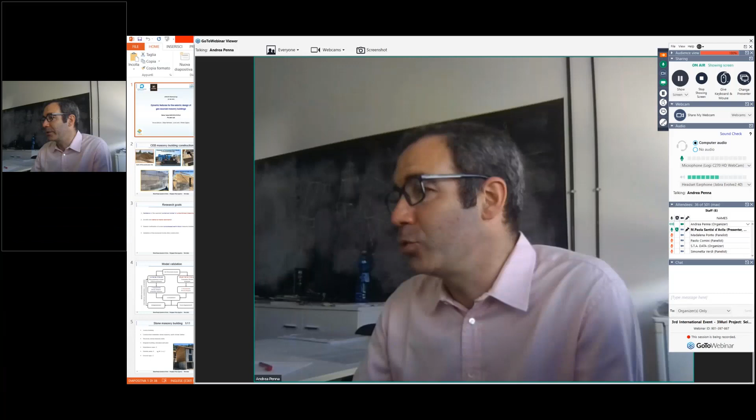We will start with Professor Paola Santisi from the Université Côte d'Azur, France. We have then a contribution by Dr. Alexandre Costa from Porto, Portugal.

Then we have a contribution by Marco Tondelli and Paolo Comini of the company Seismic 360 in Italy. Then we have a usual contribution, as we had also in the past, by the group of Professor Rita Bento, Instituto Superior Tecnico of Lisbon, together with Maddalena Ponte, a PhD student at the same institute, co-advised by myself.

And in the end, we will have a contribution by Dr. Stelios Kallioras, postdoctoral researcher at the Department of Civil Engineering and Architecture at the University of Pavia, and formerly a researcher at the Joint Research Center of the European Commission in ISPRA.

So I think we can start with a very interesting presentation, which will be given by Professor Maria Paola Santisi d'Avila. The title of her presentation is Dynamic Features for the Seismic Design of Geo-sourced Masonry Buildings. It is a very interesting research project and a very interesting application of the 3Muri capabilities. Please, Paola.

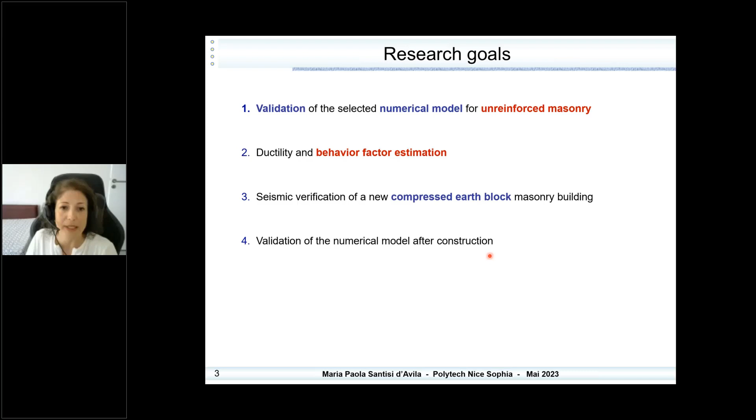Now we are awaiting the end of construction to validate the model by comparison with the structural response to ambient vibration. The idea to validate the model was to compare, in terms of dynamic features, in particular frequencies and mode shapes, using both numerical and operational modal analysis.

For this, we started with an existing building. It was a stone masonry building already constructed by the same company.

The structure is composed of stone masonry walls, and the slab was realized with beams, joists, and plank in timber material. The building is irregular in both elevation and plan, of importance class 2, in seismic area number 4 corresponding to the French mapping, with an acceleration in rock outcropping of 1.6 meters per second square in a ground type C.

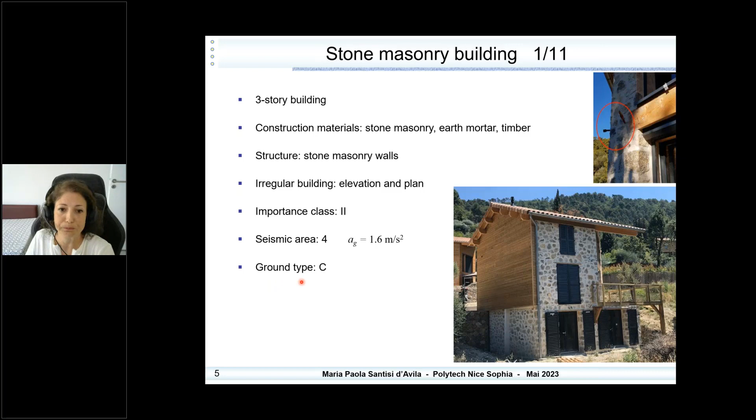The chaining is guaranteed by steel rods, so the box-like behavior can be guaranteed. The most difficult part in the validation of the model was the selection of the slab stiffness. To validate the model, we selected a moderately flexible floor. Remember the slab is done with timber elements, so it was necessary to define the slab stiffness in two directions.

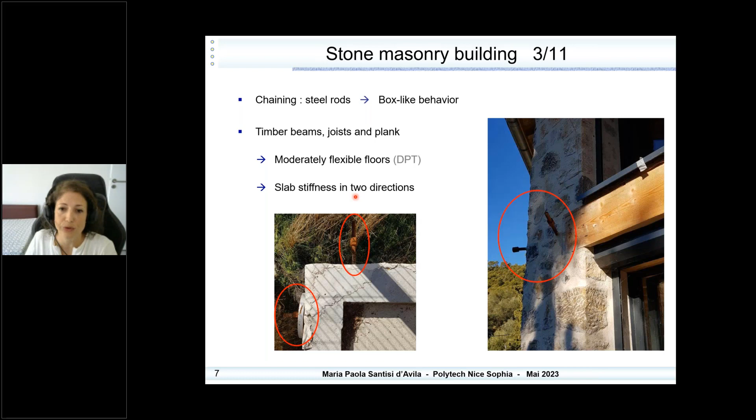According to the literature, we worked in 3Muri software with the idea that it was a new building, so the strength criteria were the ones for a new building. This meets the case of flexure and rocking, friction in the mortar bed, and the limit shear given by the diagonal crack of blocks. Here you can recognize the strength criteria selected for new constructions.

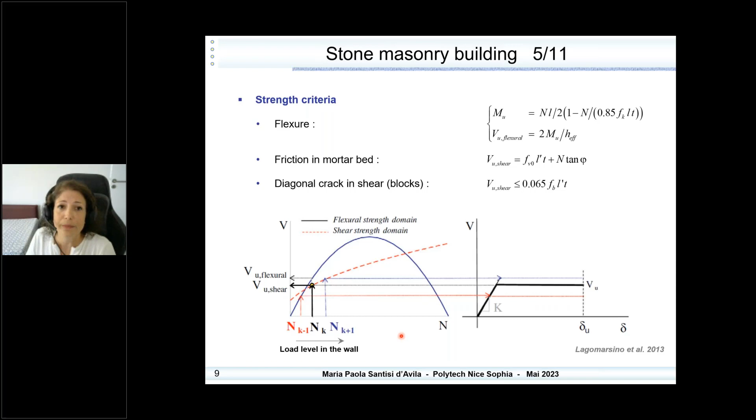Concerning the materials, the elastic parameters were obtained by tests, and the parameter we selected to calibrate by comparison with measures was the Young modulus, because it was the more uncertain parameter, considering the house is unoccupied, so the mass was quite known.

We performed, in collaboration with CEREMA, the instrumentation of the building. Six sensors record simultaneously with only one acquisition, and in parallel one measure was done in free field, far away from the building, to estimate if soil structure interaction was important or not.

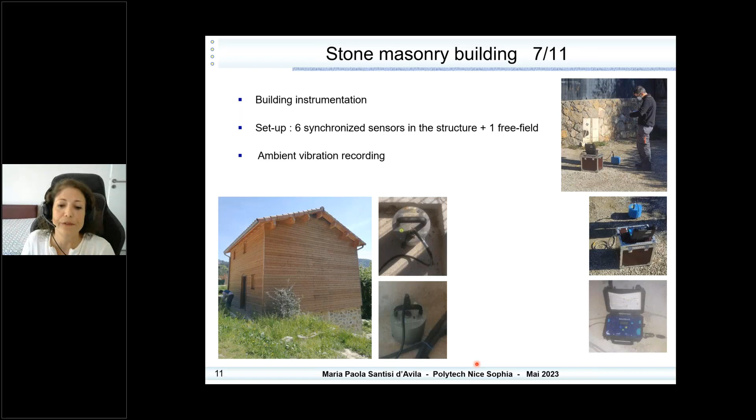This ambient vibration record, with operational modal analysis, was compared with the result of numerical modal analysis.

The first mode in both cases is a translation, so a similar mode shape is obtained, with a frequency that is calibrated by changing a little bit the Young modulus, but we obtained a value close to the test on the materials. The 3Muri software gives an effective mass of almost 70%.

The second mode is a translation in the other direction, so the frequency is well reproduced in both directions. As I said before, it was important to well calibrate the behavior of the slab and the connection with walls. So in the second mode, we have an effective mass of almost 30%.

The third mode is a torsion. In this case, we have a 20% error in frequencies, but the mode shape is quite similar. The effective mass is negligible in the numerical model, but is well evident in the records.

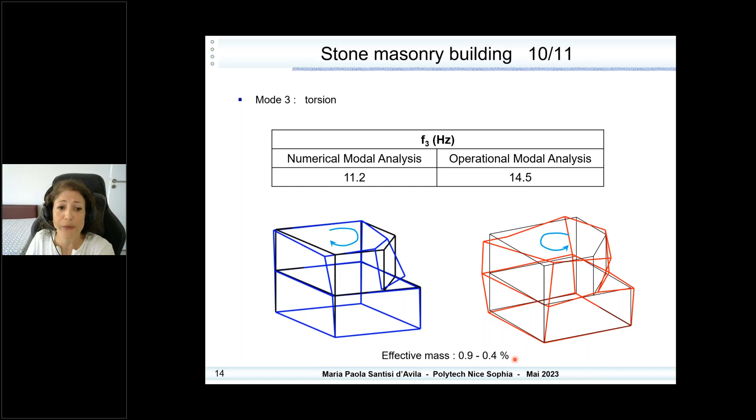Here you have a summary of data obtained by 3Muri and by operational modal analysis. We can observe that the error is negligible for the two translations, both in terms of frequency and mode shape accuracy.

After the validation of the model in the elastic domain, we performed the pushover analysis according to the code. In the case of uniform distribution, this is more similar to the behavior of the system in plastic condition.

And for the modal distribution, we decided to use different solutions: a linear distribution, a unimodal distribution using a distribution proportional to the first mode displacement, and a multimodal distribution in the case of a deformation obtained for a cumulative effective mass associated to 90% of the total mass.

So with these four load distributions, two directions of loading on both sides, and the option of accidental eccentricity, we have 48 simulations that are performed. Two key points of the analysis were the choice of the control point displacement.

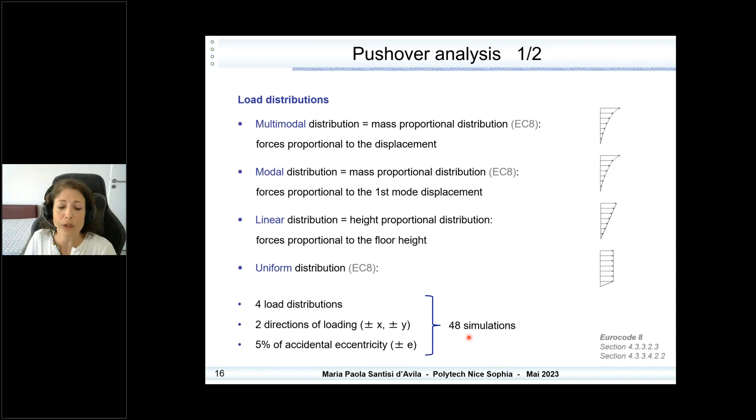In this case, we accepted the proposal of the 3Muri software to use the average displacement of upper floor nodes, weighted according to nodal masses. And we selected as a collapse definition the ultimate displacement achieved in a pier. So in all the analyses, the collapse is achieved in shear.

Before explaining how we estimated the behavior factor, let me remember some definitions. First of all, the ductility: this is the ultimate to yielding displacement ratio.

The strength reduction factor is the ratio between the base shear force attained by a linear oscillator and the shear force attained by an elastic-plastic oscillator for the same target displacement.

The overstrength ratio is the correction if we are in the case of a bilinear idealization of the capacity curve. In this case, the yielding force, the base shear force corresponding to the yielding, is a bit different from the force corresponding to the first crack in a nonlinear capacity curve. And the product of these coefficients gives us the behavior factor according to the code.

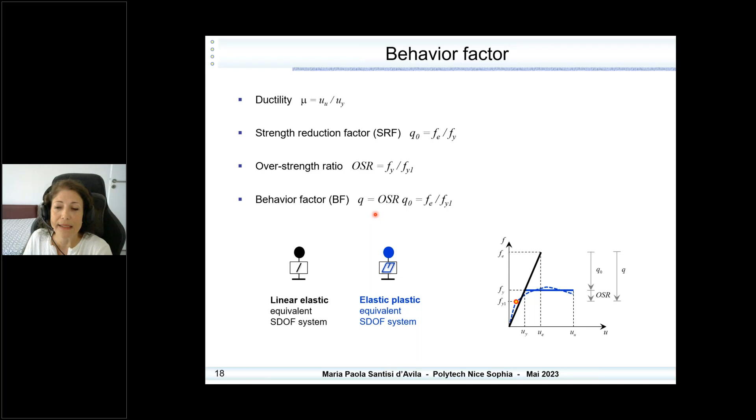So the main idea is starting with the three-dimensional model of the building. In 3Muri software, we can obtain the pushover curves. And I remind you that we performed 48 simulations, and we have a similar number of capacity curves and bilinear idealizations.

On the other side, the Eurocode gives us the possibility to generate a set of accelerograms compatible with the elastic response spectrum given by the code. So the idea is to generate a set of accelerograms, impose them at the base of the 48 oscillators equivalent to the multi-degree of freedom system, and obtain the response at the top.

The behavior of this oscillator is elastoplastic, so the hysteretic loop, by imposing that the yielding displacement is associated with the target displacement for a fixed behavior factor, we obtain by the hysteresis loop the ductility that is attained for the imposed load. So in this case, we obtain a curve associated to this specific building, that is the average ductility versus the behavior factor. I say average ductility because it's the average for the set of accelerograms that are used.

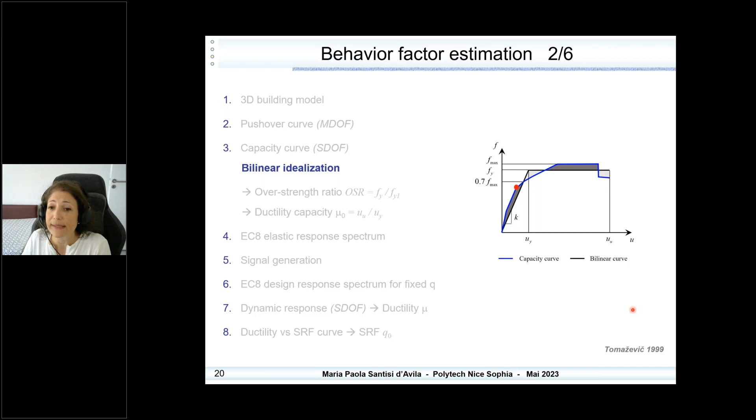So just to underline some points, the bilinear idealization is performed classically by imposing the elastic stiffness and the equivalent area under both curves. Here you can see the 48 capacity curves obtained by 3Muri software. You can observe that the eccentricity doesn't give a difference between the curves, but you can have different strength and ductility for the different load distributions and different directions.

Here you can observe the bilinear idealization of the 48 curves, and you can observe by the colors that the choice of the load distribution can change a lot the level of strength and ductility.

And here, just to verify the compatibility of the accelerograms that are used, the set of accelerograms give an average response spectrum that is compatible with the target response spectrum of the Eurocode.

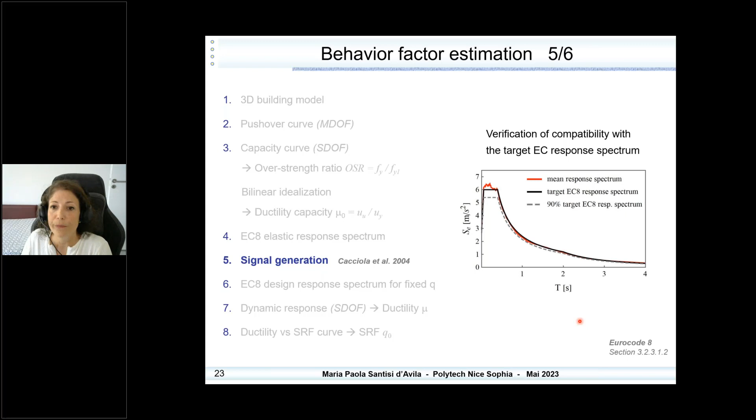So the 48 curves of ductility versus strength reduction factor, the behavior factor, are shown in this figure, but we selected 8 curves that are associated to the minimum behavior factor, and we can see the numerical values with the same color in the curve.

What you can observe is that these values are higher than the minimum one proposed by the Eurocode. So if we don't have an estimation for the building, we are obliged to use the minimum value given by the Eurocode, that is 1.5.

But in this case, we have this estimation, which is very important from an economical point of view for the company, because it represents that if we demonstrate the ductility is higher, we can design for a lower acceleration, lower seismic loading. So this estimation is very important economically for the construction company.

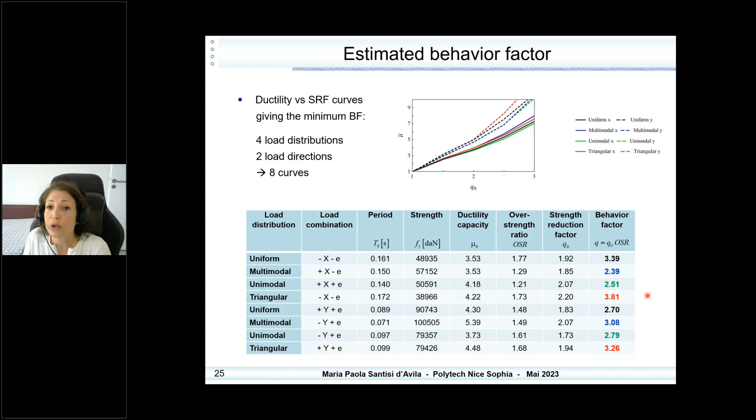So at the end, we performed the stability verification, both in terms of displacement as proposed by the Eurocode, and also in terms of strength. You can see that for the uniform load distribution, the verification is positive, but for the multi-modal distribution, we have some limit values when we perform the verification in terms of strength. So it can mean that the strength verification is more restrictive.

So now that we finished this theoretical part, we performed the seismic design of the building composed of compressed earth blocks. It's 40 meters long and 10 meters wide.

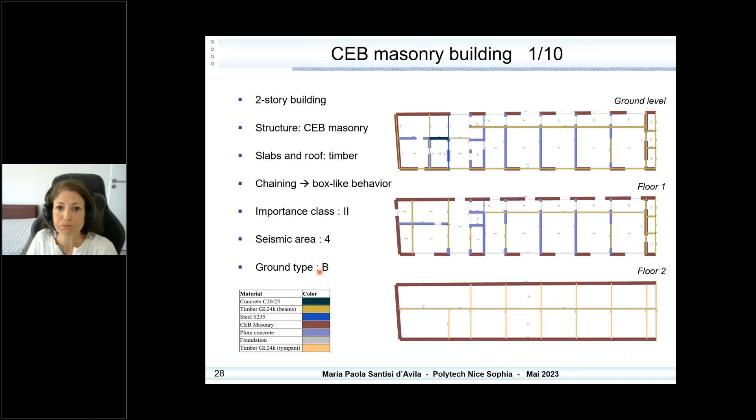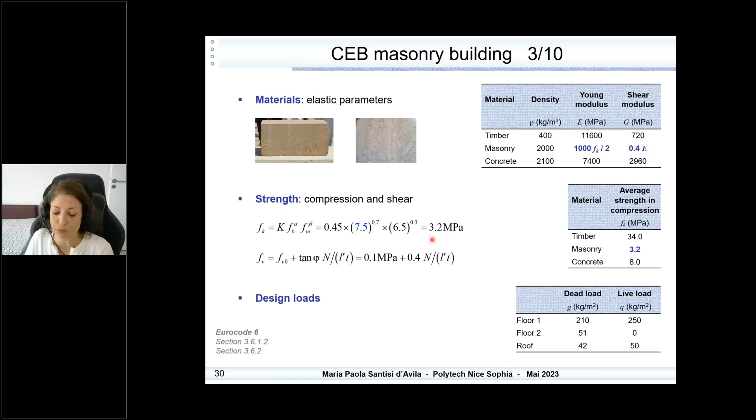So you can see that with the strength in compression of the block of 7.5 megapascal, we arrive at an average strength in compression for the masonry of 3.2. So this is the model that we obtained with 3Muri and the relative mesh.

The numerical model analysis gives an interesting result because as the building is very long in one direction, we have 3 mode shapes that are more or less dominant, each with an effective mass of almost 20%. So we observe that we don't have a dominant translational mode, but a translation of only one part of the building for the first mode, the second one is the translation of the other part, and the third one also has an effective mass of almost 20%.

In the other direction, the X direction, we have a dominant translational mode associated to 80% of the total mass. So the verification is done in terms of displacement and strength.

It's okay for both uniform and multimodal load distribution. In this particular case, it was important to use the multimodal distribution because the first mode was associated to only one part, so it was complicated to give a load distribution stressing only one part of the building. So we decided to work with the multimodal distribution, giving a more regular load distribution.

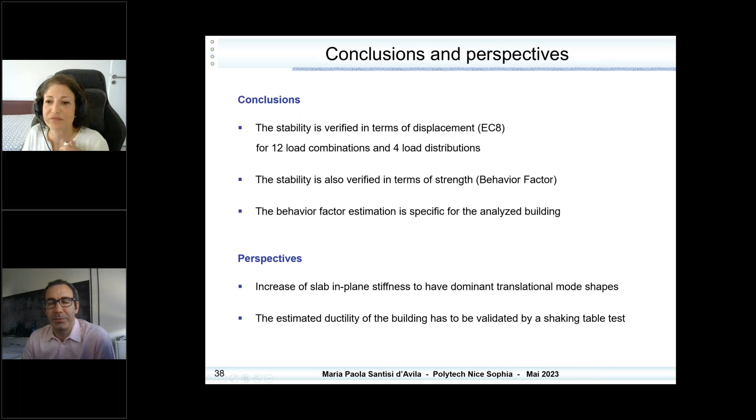Thank you, Professor Santisi. Thank you, Paola. I think that your presentation was really interesting because the project is really innovative, and in the current times when we have a lot of attention to sustainability, this project goes really in line with these needs, which are not new but are now better understood.

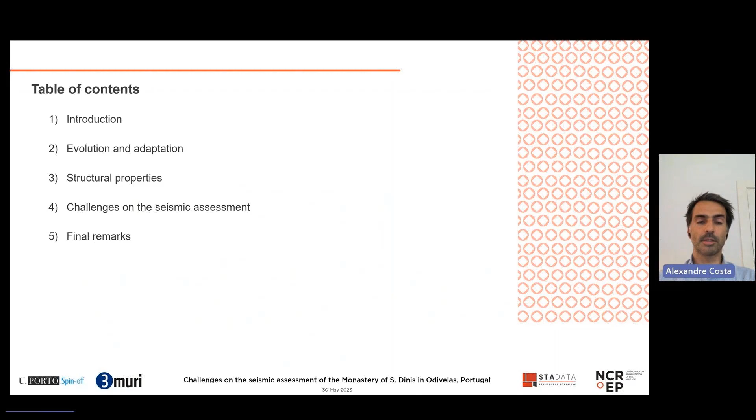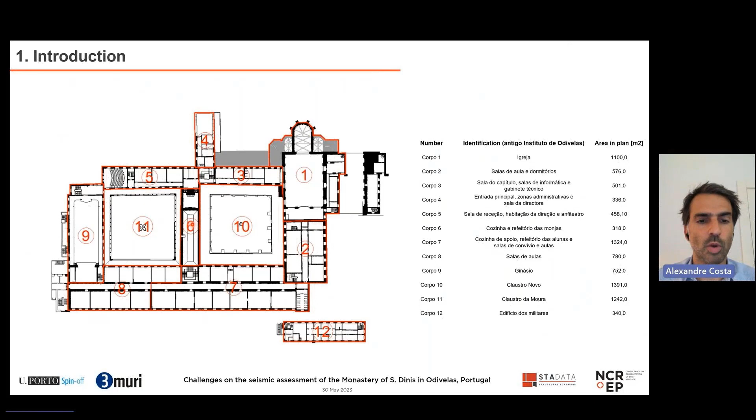In the main part we have 11 different constructions, plus another one, the 12th, which is an isolated building. You have here the church and the 2 cloisters. We are speaking about 10,000 square meters of implantation area, and with 2 to 3 stories, around 20,000 square meters of total construction area.

Some information dates from the 13th century, possibly the construction date is 1295. It took 10 years to be built, with several adaptations and damages along the years, one of the most important being the 1755 Lisbon earthquake. In the end, only some parts of the church and the cloisters remain from the original construction. It should also be mentioned that during the 20th century several modifications were made, mainly using reinforced concrete slabs and some beams.

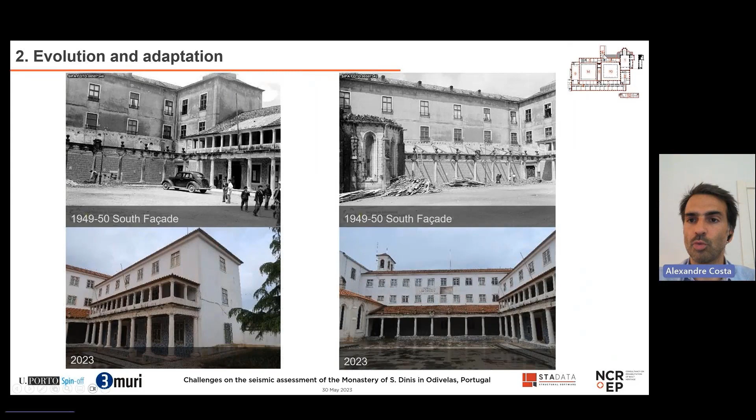Here's some historical information. You can see, for example, some military buildings built around the mid-20th century, and here in the facade, new openings in these 2 buildings. Then, for example, the gym, building number 9, from the middle of the 20th century, with 4 main columns to support the roof, and some supports to the balconies, where now we have reinforced concrete slabs and a metallic roof.

And the church, where we can see the original part and what was damaged and reconstructed, and also the loss of quite interesting paintings and decorated ceilings over the years.

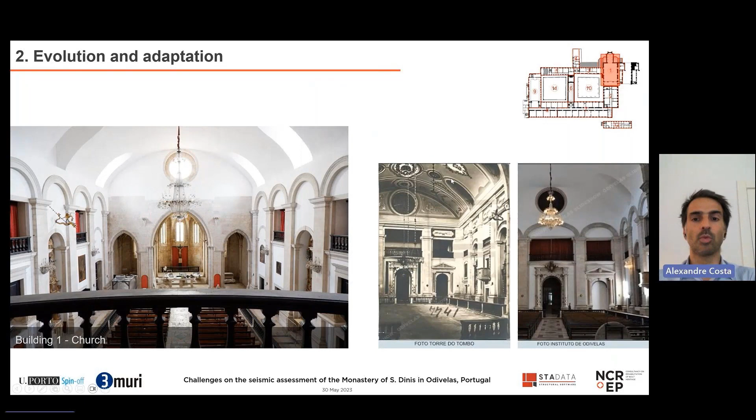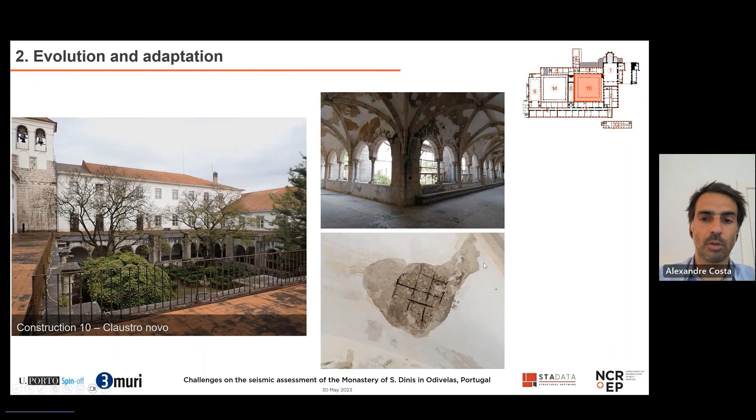And here the 2 cloisters, where we have stone columns supposedly supporting vaults, but these vaults actually have reinforced concrete slabs. As you can see here in cloister part number 10, and then in part 11 the same thing, everything is made of reinforced concrete, and here you have a timber structure.

What is going to be done in the monastery? The municipality's objective is to turn the monastery back to the local community, because nowadays it is not used. So the main point is for it to be used as a museum in some part of the church, this historical part, including this part also.

Then we have the municipal services in other parts, here an auditorium, here residences for students, and here a music hall. So it's going to be a very interesting intervention, but with this occupancy it means we are working with constructions that can be considered importance class type 3 according to Eurocode 8.

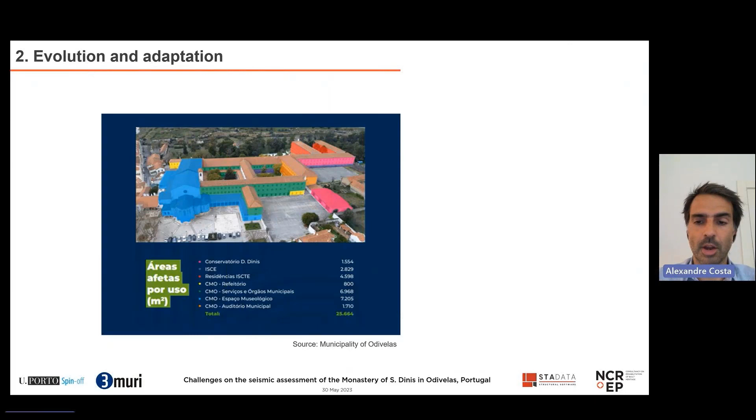Regarding structural properties, 121 survey windows were made for timber, reinforced concrete, and masonry characterization. Timber properties were defined based on species identification analysis, mainly pinus. Then for reinforced concrete, several core samples were taken, as well as rebound hammer (Schmidt) tests.

Regarding masonry, several wall surveys were made by archaeologists, since this is a national monument. It was possible to define three main families for stone masonry, and also two types of brick masonry, one with solid bricks and another with two horizontal holes. In addition to that, we did some flat jack tests. So, making use of all this information, the material definition was made using the Italian code.

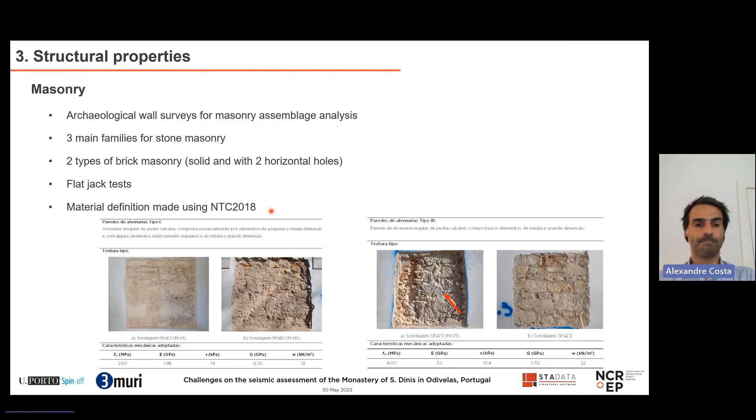Then the challenges started. The first one was regarding the seismic action. Why is that? Because being an importance class 3 building, we need to do the seismic assessment for 3 damage levels: damage limitation, severe damage, and near collapse.

In our national annex, when working with existing constructions, we can use what is called the reduction coefficients for existing constructions, found in this part. However, while for severe damage and damage limitation they decrease the seismic action, for near collapse the seismic action is increased. Let's look at type 1.

Let's say that for severe damage, we are using just 75% of the seismic action considered for new buildings. But if we are doing the seismic assessment for near collapse, we are increasing the seismic demand by 62%. On the other hand, when working on the assessment part, not the retrofit, we can even reduce to 90% of this action.

So for example, for type 1, for severe damage, we have the seismic hazard, or at least the PGA that comes from the seismic hazard. Then you have 90%, then 75%, but then we multiply it by the coefficient of importance. This means that in the end we have almost the same seismic action considered for new buildings with importance class 2. So this is somehow discussable.

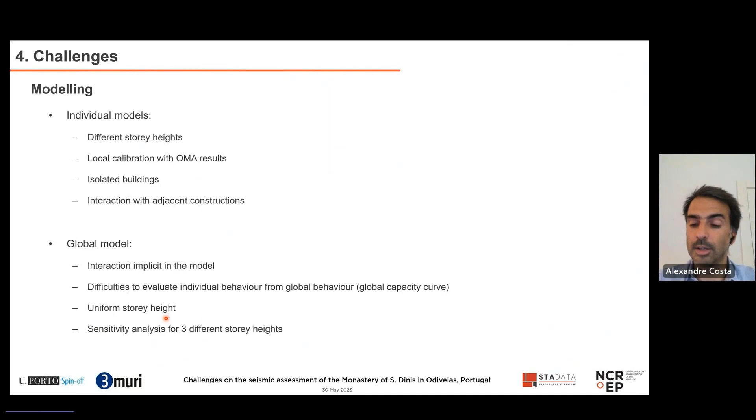So one of the points was to use a uniform story height for all the buildings, but also do a sensitivity analysis for 3 different story heights. We started from the individual models, but since the beginning we decided not to go in this direction.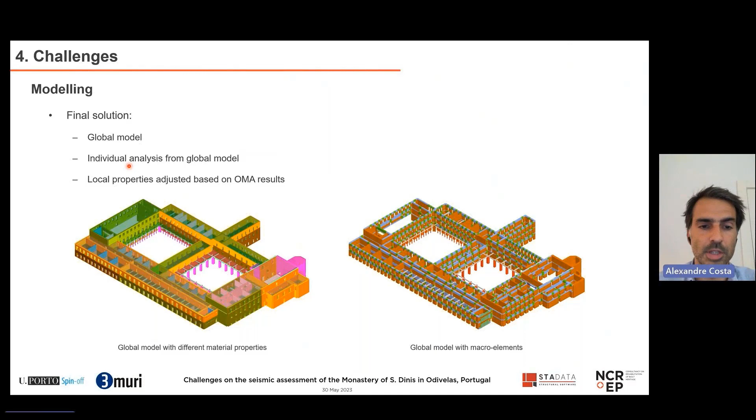For example, in this direction, the Y direction, for this specific point of the capacity curve, you can see the damage distributed along several different buildings - not concentrated in one building. While on the analysis to the right, you can see that in this direction, the damage or failures are mainly concentrated in this part, in building number 2.

So this means that despite working with a global model and global behavior, we could still look at the individual behavior of each building, and from there assess what the problem was and what should be tackled in the strengthening design.

Then we have the problem of the out of plane mechanisms. We used 3Muri to analyze it, and local mechanisms were defined based on the literature and also on the local connections that we assessed on site, taking into account the existing cracking patterns, as well as the presence of tie rods, for example.

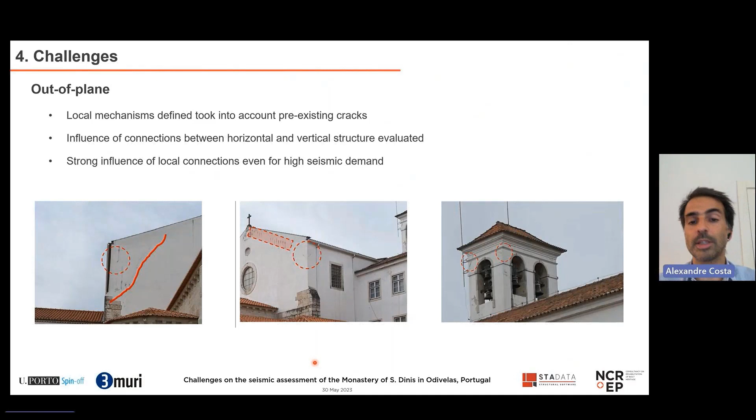Moreover, we wanted to evaluate the influence of connections between horizontal and vertical structure, so the importance of slabs and roofs. These simulations showed it has a strong influence even for high seismic demand, meaning that in the strengthening phase we need to properly connect horizontal to vertical elements.

So we came out with 24 local mechanisms for all the monastery. For example, here a typical gable failure, and here a simple overturning mechanism, taking into account the connection at the roof and at the floor level.

This was done for different buildings and different parts. Just to show two examples: a global overturning here for building number 4, the building we showed in the beginning. If we connect to the top, we can increase the seismic capacity up to 10 times. The same applies to other walls.

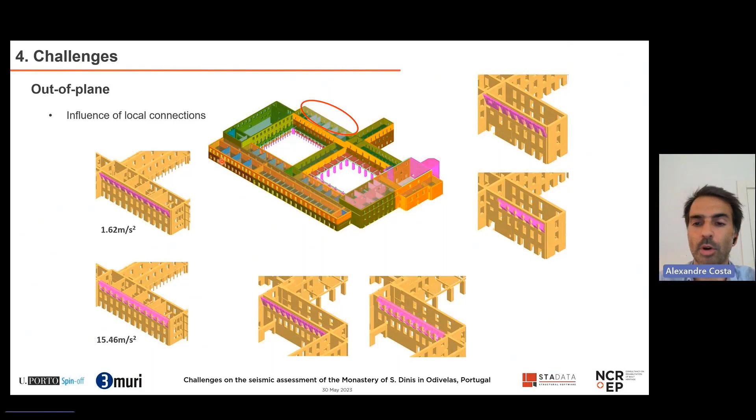So this means that in the strengthening phase of the monastery, this should be one of the key points used in the design.

So, some final remarks. This was a real challenge as a case study, mainly due to the dimensions and the different wall typologies. It was also important to use a proper model to simulate the interaction between the buildings. To do that, you need some modeling simplifications, but it's very important so you can control the model in the end and understand what is going on.

And we could go from the global capacity curve to local analysis. Definitely it can be said that 3Muri expedited the process of modeling and analyzing results within a reasonable time frame. The whole process, including inspection, diagnosis, material characterization, ambient vibration tests, and seismic analysis, took more or less three months.

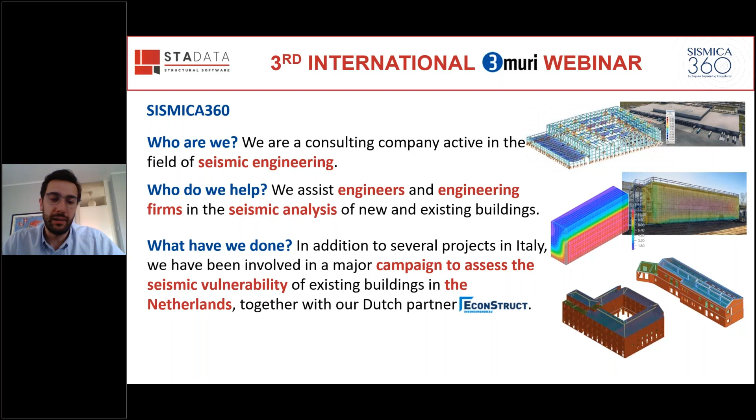The issue of earthquakes in the Groningen region is linked to gas extraction. The gas field was discovered in 1959 and is the largest in Western Europe in terms of size. The problem is that 90% of the buildings in the region are built with masonry and were not designed to withstand seismic forces. For this reason, since 2014, alongside the reduction in gas extraction, a campaign to assess the seismic vulnerability of buildings in the region has been started in order to identify any critical issues and reinforce buildings where necessary.

The seismic vulnerability assessment is carried out in accordance with the guidelines NPR. These guidelines have undergone several modifications and updates over the years, leading to significant differences in the definition of the seismic capacity of buildings. These guidelines are available in 3Muri among the list of national codes that can be applied in the calculation.

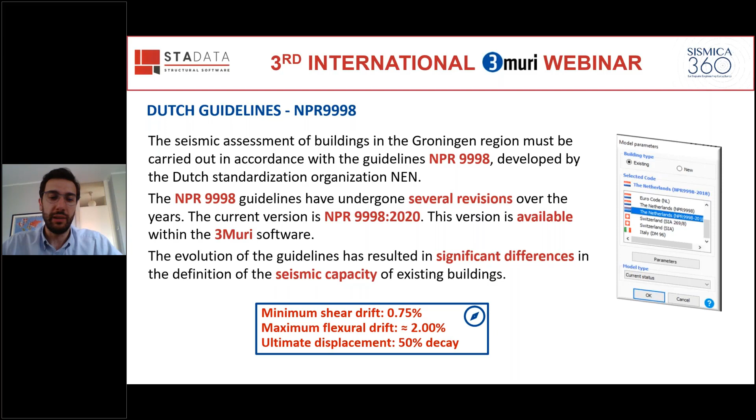The NPR guidelines differ quite significantly from the codes we are accustomed to, such as Eurocode 8. In the bottom box of the slide, you can see some peculiar characteristic aspects of this guideline. The newer NPR guidelines push the structural capacity much further than, for example, Eurocode 8, as you can see from these values.

We have talked about the capacity. Now let's discuss the demand. The seismic input is obtained from what is called the NPR web tool, which is essentially an internet accessible database. By entering the geographical coordinates or the address of the building, it provides the elastic spectrum and other data that can be useful in structural analysis.

Due to the progressive reduction in gas extraction, the seismic input has significantly decreased over the years, which has had a major impact on defining the demand.

At the beginning of the assessment campaign, in 2014, most buildings required rather major retrofits. In particular, diaphragms were being retrofitted by stiffening them in any case, so there was no emphasis on analyzing them with their real flexibility. With the various updates of both the guidelines and the seismic input, the trend changed and the need arose to analyze buildings using the real stiffness of the floor diaphragms. So single wall analysis became very important.

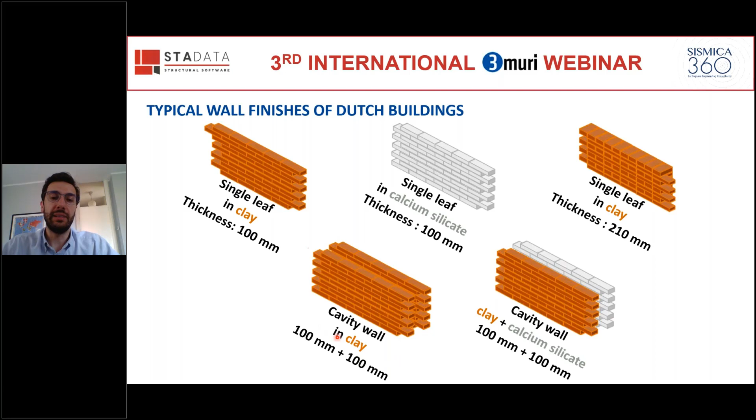Thicker single walls of 210 millimeters are typical for perimeter walls in buildings from the early 1900s, while newer buildings have cavity walls on the perimeter.

Let's focus now on the floor diaphragms. We can have three major structural typologies. The first one is timber floors, timber diaphragms, constructed with either simple planking, or one or two panels of OSB, oriented strand boards. These three solutions have increasing stiffness.

The second structural typology is hollow core slabs, which can be of two types. The first one is a very typical Dutch component, the NeHoBo slabs, which are hollow core slabs made with perforated brick units connected with cement mortar. These were commonly used in construction from the 50s to early 80s, and usually they cannot be considered rigid.

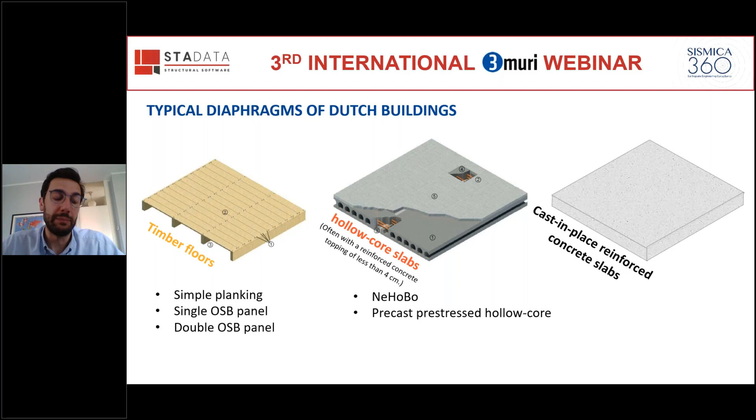The second typology of hollow core slabs are the pre-stressed hollow core slabs. These are typically found in construction from the 80s onwards and often have a collaborating topping sufficient to be considered rigid. Lastly, we have the cast-in-place reinforced concrete slabs that can be considered infinitely rigid.

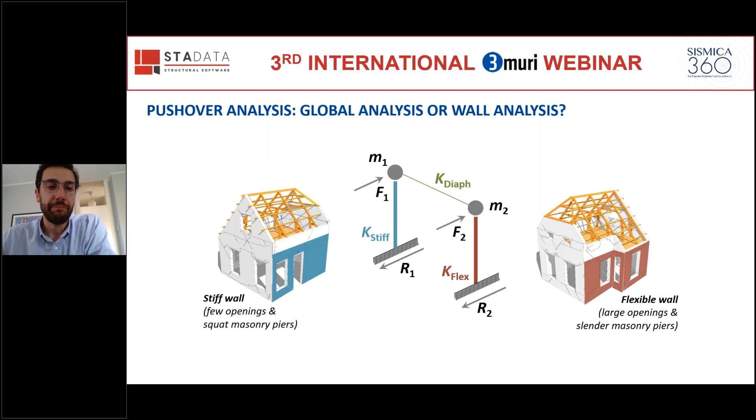If the stiffness of the diaphragm, the green one, is much lower than that of the walls, especially the more flexible one, the red one, K-flex, then each wall is responsible for the mass concentrated at its top. Therefore, in this case, the most representative analysis type is the single wall analysis.

On the other hand, if the diaphragm is much stiffer than the walls, global analysis can be used because the diaphragm can couple the behavior of the two walls, and torsional effects are also possible. In reality, actual buildings lie somewhere between these two scenarios.

Our approach is to consider the ratio between the magnitude of the stiffnesses involved. So if the diaphragm, the green one, has a stiffness in the same order of magnitude as that of the walls—that is, if the K diaphragm is at least 10% of the stiffness of the weakest wall, the red one—in this case we perform global analysis. Otherwise, single wall.

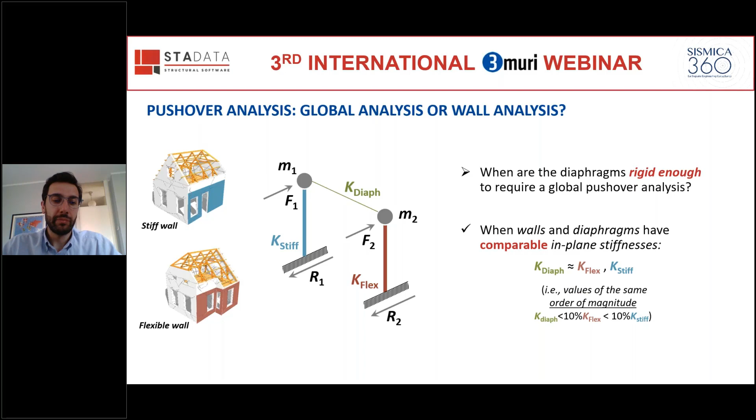So now the problem is how to evaluate the stiffnesses. Regarding the stiffness of the diaphragms, the NPR guidelines provide tabulated values of secant stiffness for different types of floor systems at various drift levels. Specifically, they provide values at two drift levels, 0.1% and 1%. Not all types of floor systems are included in the tables, so for those not listed, reference can be made to specific scientific literature.

The biggest issue is how to evaluate the flexibility or stiffness of the walls. One might think of considering the elastic stiffness of the wall piers, which, however, is not representative of the nonlinear behavior of the masonry, and at the same time turns out to be a very high stiffness that almost always forces a single wall analysis in the case of timber floors or semi-rigid floors.

Therefore, we devised a more practical, nonlinear approach. I want to underline that what I show you is our approach—I underline the word our. It is not proposed in any official document. It is just a formulation we came up with to give us a rule for applying one type of analysis or the other.

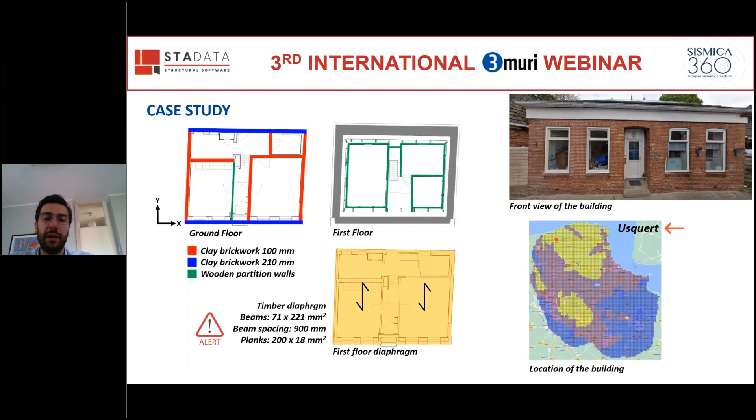So we apply our procedure. Step one: we perform a global analysis with a rigid diaphragm in 3Muri. Here are the results. Everything is verified, green color.

Now let's consider the walls arranged in the X direction, the direction perpendicular to the floor joists. We divide the floor into two diaphragm fields: diaphragm 1, the blue one, and diaphragm 2, the red one.

We have to consider their dimension in order to calculate the displacement relative to the drift of 0.1%, for which we are going to evaluate the shear force at the base in each wall.

The relative displacement for a drift of 0.1% in the two diaphragm fields are, for diaphragm 1, approximately 5.5 millimeters. For diaphragm 2, approximately 2.25 millimeters.

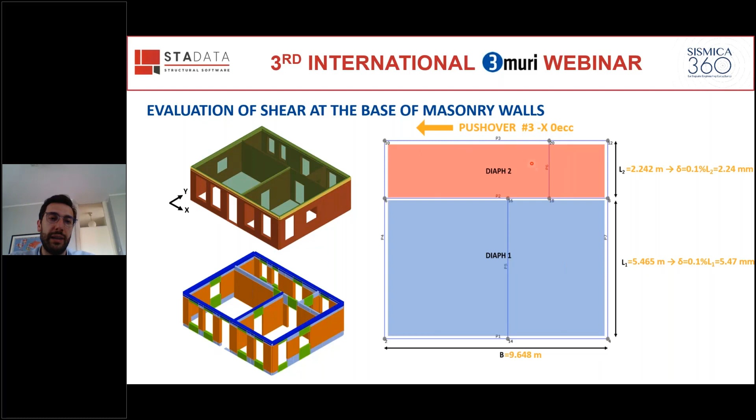Now let's refer to an analysis in the X direction, such as pushover number 3 in the negative direction without eccentricity. At this point, for each wall, we can query the results from 3Muri and extract the shear values of each element of the wall in the X direction at the target displacement that we have calculated.

In this slide, I present an example for the wall P1. This wall is connected only to diaphragm field number 1, so the displacement at which we evaluate the shear is 5.47 millimeters. The closest pushover analysis step to the target displacement for wall P1 is at a displacement of

5.48 millimeters. We can extract the tabulated values of all the elements belonging to that wall, and the total base shear for wall P1 will be the sum of the shear values at the base of these elements.

We follow the same procedure for all three walls in the X direction that we are analyzing, and the results obtained are shown in this slide. We can see that the walls P1, P2, and P3 have base shear values approximately equal to 28 kilonewton, 66 kilonewton, and 48 kilonewton, respectively.

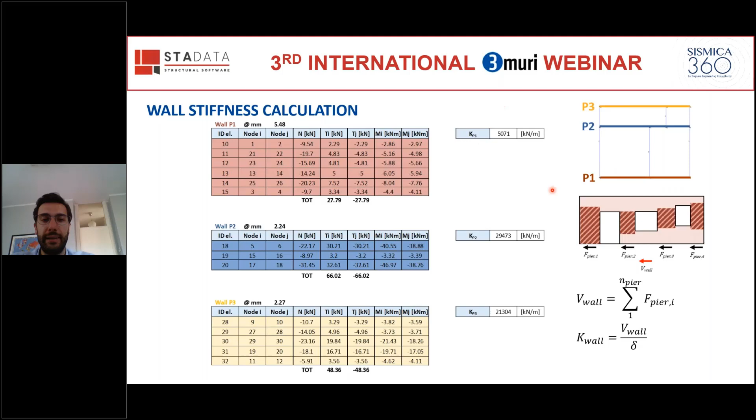By knowing the base shear and the associated displacement at which the base shear was calculated, we can now compute the stiffness of all three walls, denoted as KP1, 2, and 3. It can be observed that wall P1 is the most flexible.

We evaluate now the stiffness of the diaphragm using the approach proposed by Brignola et al., which depends on three contributions: the flexural contribution of the planks, the shear contribution, and the slip lane contribution of the nails.

Now, knowing the stiffnesses of the walls and the diaphragm, we can compare them and see if the diaphragm stiffnesses are in the same order of magnitude as the wall stiffnesses. As you can see, the ratio between the two stiffnesses is always less than 10%. Therefore, we can conclude that the diaphragm stiffnesses are not in the same order of magnitude as the wall stiffnesses.

So according to our, and underline our, practical approach, we should perform single wall analysis.

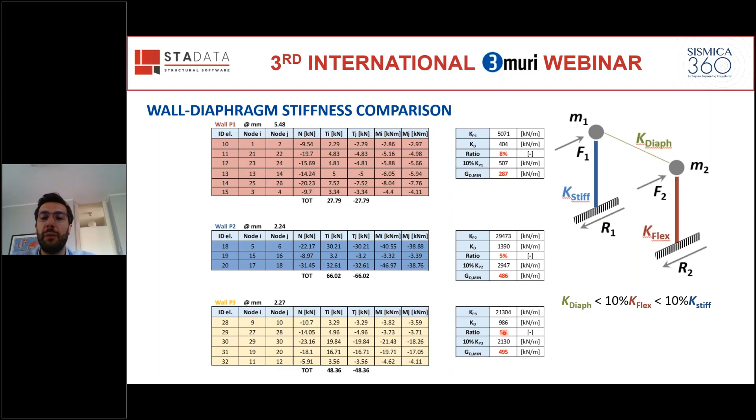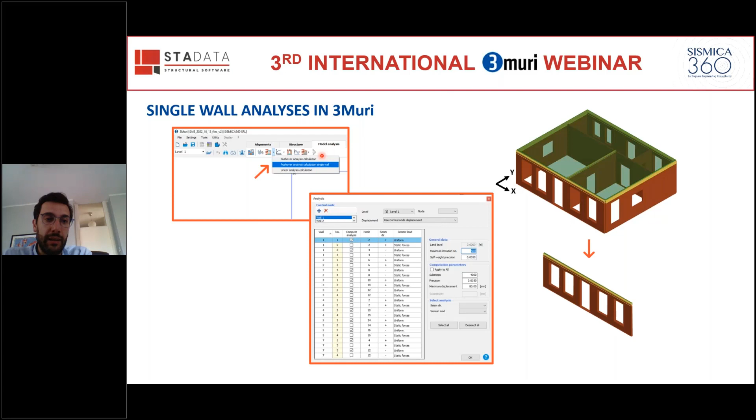At this point, we will use the single wall analysis tool provided by 3Muri, so we can compare the results.

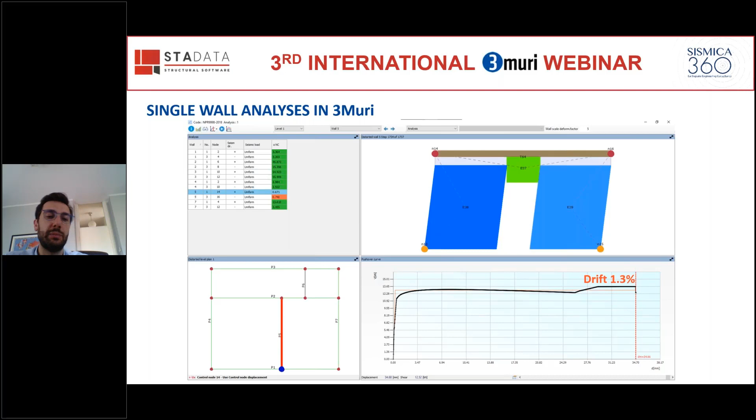These are the results, the critical pushover for wall P5, and we can see that the ultimate displacement is reached at a drift of 1.3%, which is higher than the value prescribed by the Eurocode, which is equal to 1.06%. In conclusion, diaphragm stiffness is a key parameter in assessing the seismic behavior of buildings.

And for this reason, it is important to evaluate it as best as possible. Through the procedure presented today, we have established a criterion for determining when to employ a global or single wall analysis. By comparing the in-plane stiffnesses of masonry walls and diaphragms, we can make informed decisions about the appropriate analysis approach.

The 3Muri software allows the user to define the in-plane stiffness of a diaphragm, and in case the diaphragm is not sufficiently rigid, also allows the user to perform single wall analysis.

Finally, it is important to note that performing global analysis on structures with highly flexible diaphragms may yield misleading results, as I showed before. Therefore, it is crucial to consider the relative stiffnesses of the components involved to ensure accurate and representative analysis outcomes. So, thank you to everyone, and for additional information, you can find here my contacts, and also the email address of the company and the website of Sismica 360. Thank you.

Thank you, Paolo. Really an interesting presentation with a topic which can be not that easy to handle in practice, because unless you establish a criterion, and you have done exactly this to decide what is a flexible diaphragm, what is not, and how to deal with these cases, then in many practical cases you tend to follow one or the other solution based on expert judgment, or say the simplest procedure that you may find.

I don't know if there is any question from the audience to you. Otherwise, I can just maybe ask you to, not really to answer a question, but to repeat something that you have already specified. I mean, you have set your procedure, your criterion to decide when using one or the other, and how can you be, let's say, sure that this assumption, this criterion works, or how can you test it?

Yes, usually when we apply our criterion, at the same time we check this with the global pushover analysis. So we also perform a global pushover analysis with the real stiffness of the floor, and we check if there is the possibility to perform a real global analysis with the real stiffness of the floor or not. There are some cases where it's very difficult to understand if we have to perform one or the other, so we decide to follow our criterion in order to assess this particular case.

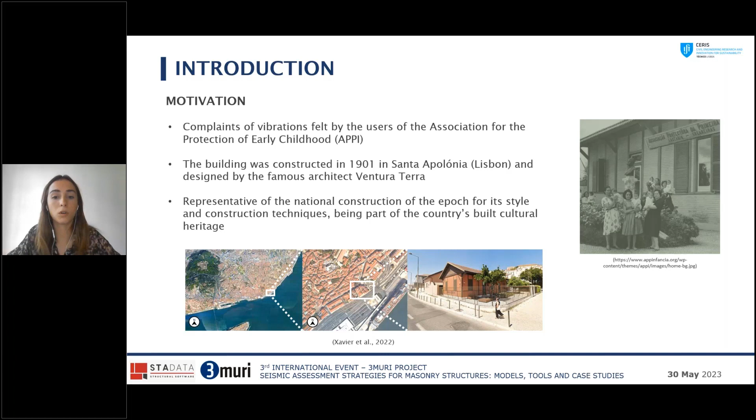The case study, which I will call APPI for simplicity, is an almost rectangular, asymmetrical building in plan. It's 10 by 22 meters squared, with walls of more or less 4.85 meters height.

To obtain the geometry and correct characterization of the building, a laser scan was carried out, also due to the importance of the building as a museum, so everything is registered. The ordered point cloud was created with the laser scanner, and then a BIM model was developed by a student, which allowed creation of the numerical model.

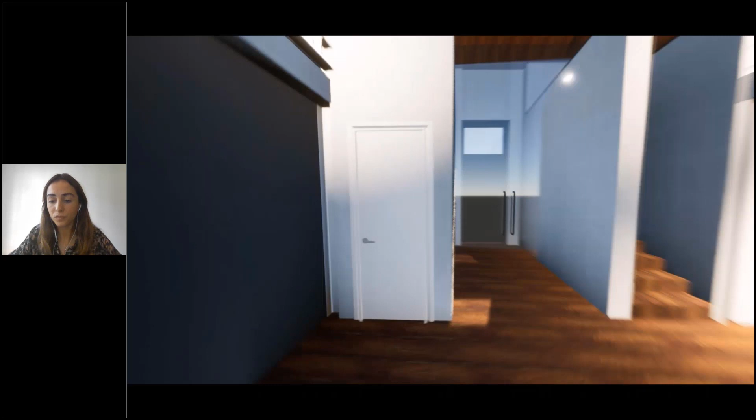Here we are entering the BIM model. We can see the building is one floor on this side, and on the other side we have 2 floors - it is a mezzanine. Here we are passing from the point cloud to the BIM model, and this is the part of the offices, the part with the 2 floors.

The building structure was renovated in 2014. It had to be completely rebuilt, since the majority of the structure was found to be very damaged. The renovation kept the same exterior layout as the original - they substituted the elements but kept the layout with the timber frames and masonry walls.

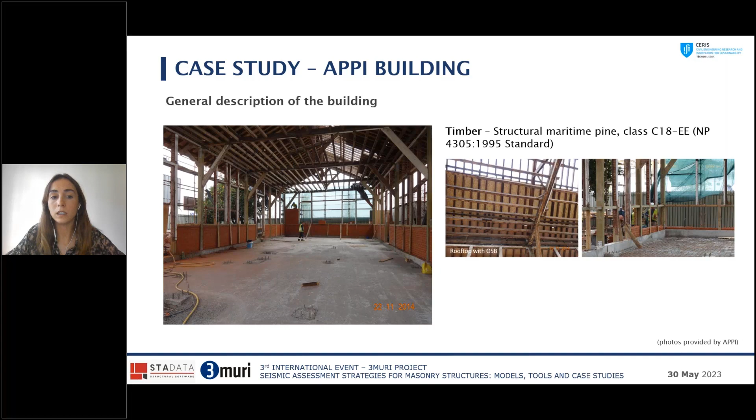You can see that the first part to be built in the renovation was the timber frame, which carries the vertical loads. The foundations were also rebuilt - the old ones were destroyed, so they built new foundations, and then the timber structure. The rooftop is also with OSB flakes, and then they started adding the masonry as infill.

The masonry used was the same type of bricks as before - vertically perforated clay bricks with 12.2 centimeters thickness - and the layout was kept the same, as you can see here.

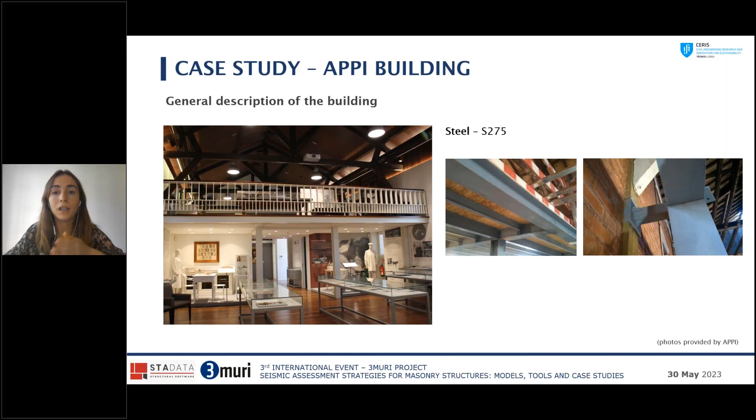Now talking about the steel part, the mezzanine had independent foundations from the outside part of the structure, but it is connected, as you can see in the detail image on the right side - the connection of the mezzanine to the timber frame. So it's connected to the timber, the 6 main timber frames.

The ambient vibration tests were carried out to characterize the structure, and the positions used to obtain the main vibration modes were the 4 points on the corners of the building. We used triaxial accelerometers with a full range of plus/minus 1 G and a sample frequency of 200 Hz.

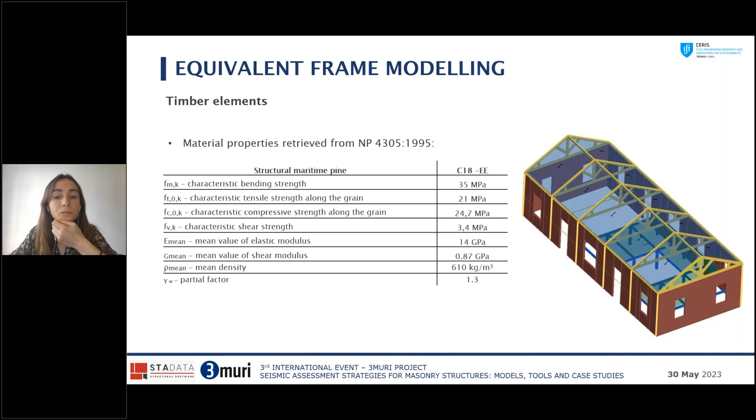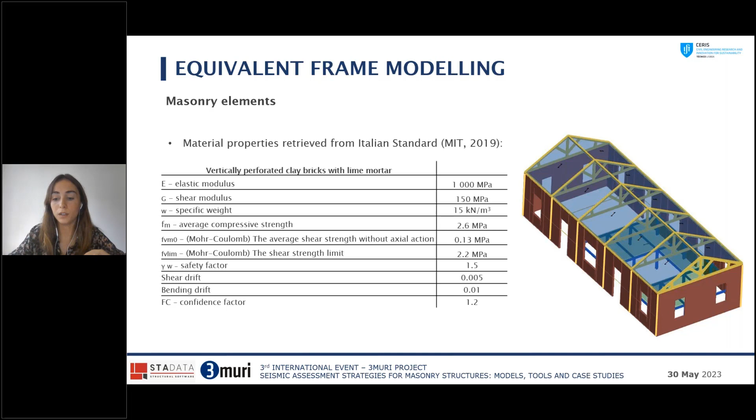For the masonry elements, we considered vertically perforated clay bricks with lime mortar. The values were obtained from the Italian standard, and we also used the Mohr-Coulomb laws, with shear drift and bending drift also defined in the codes, with a confidence factor of 1.2.

Then this is a very important part: the modifications of the automatic mesh. The building has very particular features, as it's not a masonry building, but a timber building with masonry parts, so some parts had to be adapted to represent the real case.

The first thing to mention is this part of the timber frame, this triangle you can see here. In order to represent it, we defined these horizontal elements as flexurally rigid elements with a very high inertia and elastic modulus.

The vertical elements that frame the windows and doors were not explicitly modeled. As you can see in these images, some of them are not connected to the foundations, and others, as in the second image, were patched.

The old part of the timber element is still there, and then a new element was patched on. So these elements, the ones around the windows and doors, just served to frame the windows and doors.

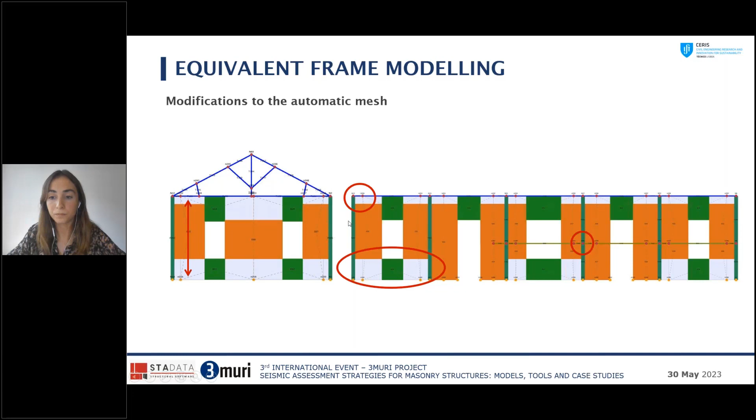About the loads, to guarantee that the masonry walls do not carry significant vertical load besides their self-weight, instead of defining a mass to the roof elements, we applied concentrated loads where the roof will in fact be supported, at these concentrated nodes.

All of these aspects I just detailed were essential to calibrate the model. Some of them we didn't understand immediately when we started modeling, but when we began to calibrate it, we realized the structure was built this way, so we had to make these alterations to take into account. All of these steps were very important.

And like this, we could obtain a good calibration with errors of 10% compared to the experimental results. We also obtained similar deformed shapes. You can see here the first row is the frequency in the transversal direction, the y direction.

In the case of 3Muri, we can obtain some curvature in the deformed shape of the longitudinal walls, which in the experimental results we cannot see, as we only used 4 sensors in the corners. Then in the x direction, again very similar to the experimental deformed shape.

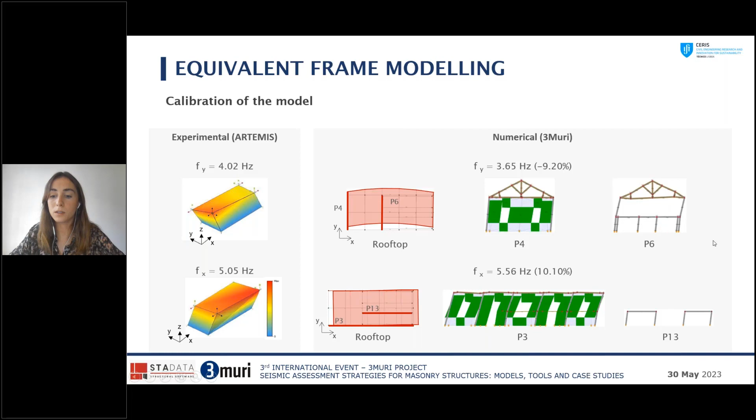The 3Muri software continues the pushover curve indefinitely, as there is no drift limit defined for the beam elements. Therefore the beam elements continue to resist in this building, the timber frames, the timber pillars.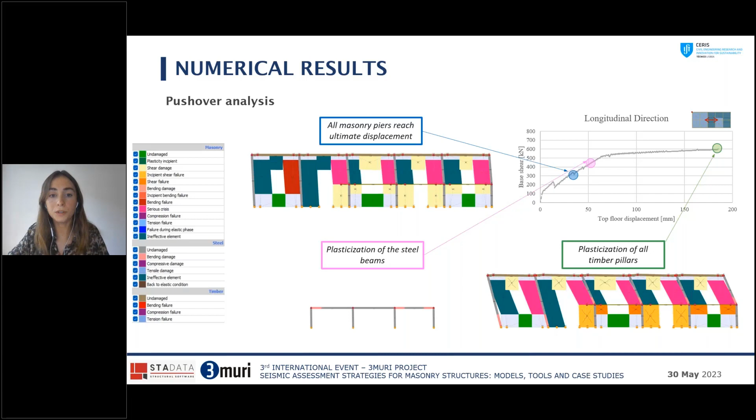Again for the y direction, we observe the same points: the blue point where the masonry piers reach ultimate displacement, then the plasticization of the steel beams, and in this case also the columns. For this direction, the steel structure suffers more plasticization, in more elements, and then the plasticization of all the timber pillars on the transverse facades is the last point in the curve.

So just to conclude, my presentation is almost finished. I would like to say that it's important to know the construction sequence and details of the structure in order to create a realistic model. This was one of the very important aspects while building the model, making sure it represented the real structure - as shown in the details: the first sequence starting with timber frames, then masonry, and the connections of the steel structure to the timber frame.

Even though 3muri is specialized in masonry structures, we can see from this work that it has the capability to model mixed timber-masonry buildings. There are, of course, limitations in the modeling of timber-steel frame buildings.

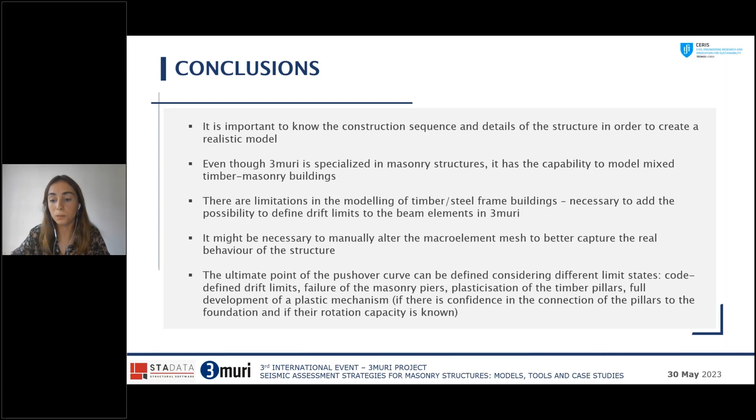Thank you very much. My presentation is over.

Thank you, Maddalena.

A really nice, interesting presentation, and in particular I think what has been really impressive is the advanced use of the capabilities of the software, which you managed to adapt to a complex and new application. This is really an interesting and very informative presentation, showing a non-standard application and proper use of what the program allows, including reasoning on the model and on the loads to be applied, the type of connections, the subdivision of elements, and all this. I think it is really helpful also for other users to see what can be done.

Let's say forcing a little bit the standard modeling into what we need in this specific case. I don't know if there is anyone in the audience who wants to ask anything, because I think one possible outcome of this presentation is that somebody tries to adapt this modeling strategy to a different topic, a different system, where we have mixed frame elements and equivalent frame elements in combination. The issue of modeling mixed structures is not resolved; it's something still open to new additions, and one of the critical issues is the way we manage to force loads to go to the elements that were built before and had already started carrying loads before the others were built in. So there are several uncertainties, but at least we can adapt and force the model to follow our thinking and reasoning on the model.

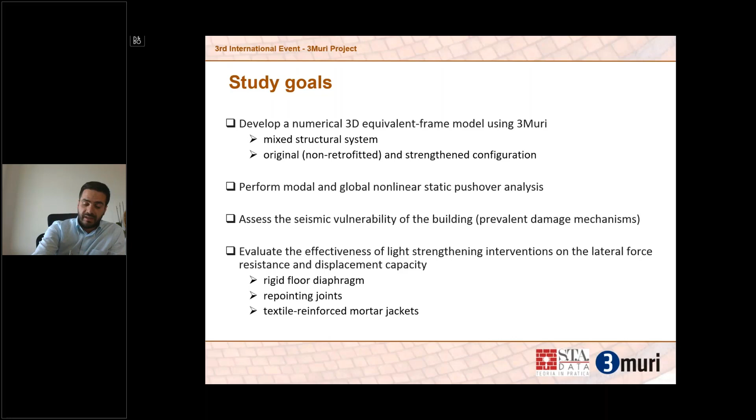The client provided us with lots of information, including documentation dating to the 1960s, a lot of photographs from which we could deduce information about the local and construction details of the building, and very well detailed architectural drawings. Here you can see some photos of the building, which seems to be in a pretty poor condition.

I forgot to mention it had a basement no more than 1.5 meters deep. In our analysis, we disregarded the existence of the basement. The client had already decided to introduce a reinforced concrete slab at the ground level.

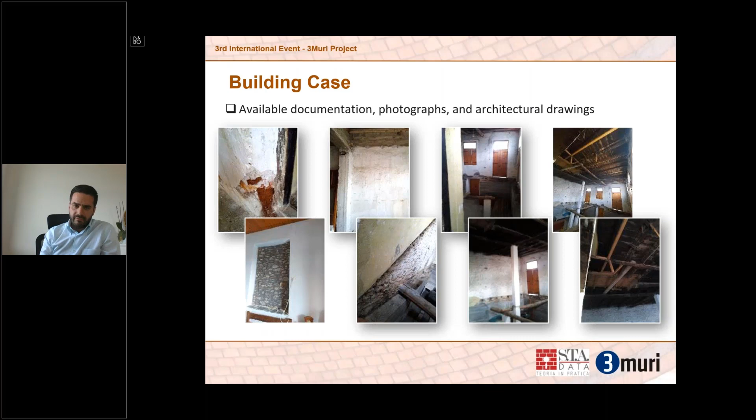So here you see the two street facades of the stone masonry structure. On the front side, there is a reinforced concrete addition, a balcony. We consider it necessary to model it, as the slab adds extra weight to the masonry walls and therefore significantly affected the analysis results.

We also introduced reinforced concrete elements to simulate the reinforced concrete frame. These are simple beam elements. The level of detail, of course, varied over the course of the study.

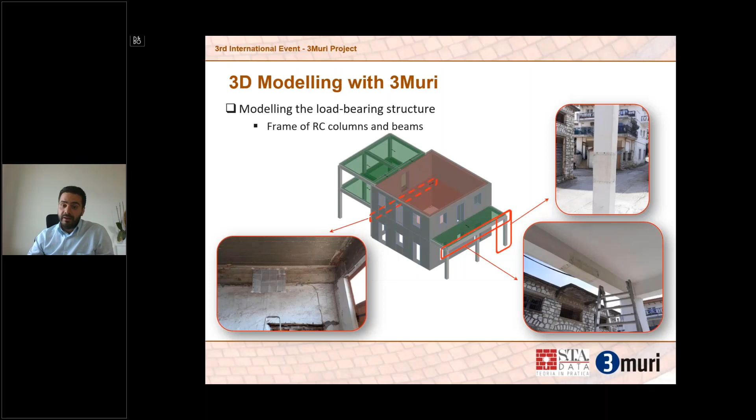At the beginning, I modeled the two buildings not attached. Later, based on information provided by the client, we figured out that the two structures are well attached, so the beams of the reinforced concrete frame are well embedded into the very thick stone masonry walls, which are 50 centimeters thick.

Here you see the floor diaphragms of the stone masonry portion. They are in a pretty bad situation, very thin and sparsely spaced timber girders support a very thin and corrupted timber sheathing. The floors are supported only in the longitudinal building direction.

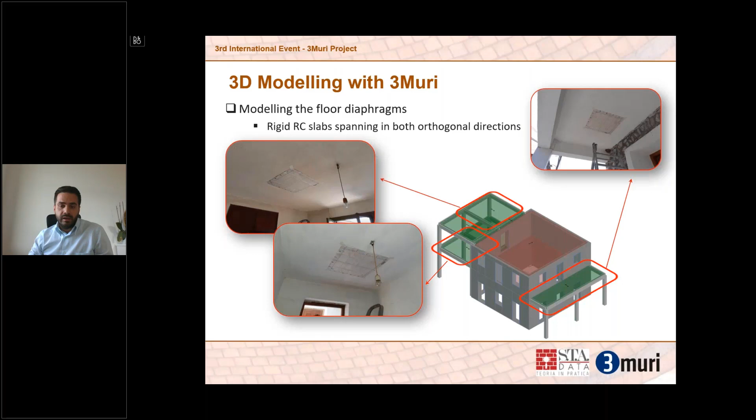Let's say that the longitudinal building direction is... I don't know if you see my mouse, the one on my left hand, not the one where the balcony is, but the other one. Here you see details of the rigid diaphragms, providing floors in the reinforced concrete frame structure and the balcony.

You're already familiar with the equivalent frame modeling strategy. The automatic mesh option of the 3Muri software didn't have any particular problem discretizing the structure into piers, spandrels, and nodes, as the geometry of the building was pretty regular. Membrane elements were used for the simulation of the flexible and rigid floor diaphragms.

As I already mentioned, we had plenty of information regarding the geometric and mechanical characteristics of the materials, as the client had already performed a series of in situ visual inspections and non-destructive tests to determine the compressive strength of concrete and the stone masonry. Also, information regarding the steel reinforcement was pretty clear, with no uncertainty.

And actually, going through the documentation, we realized that the reinforced concrete frame was a pretty well-designed frame.

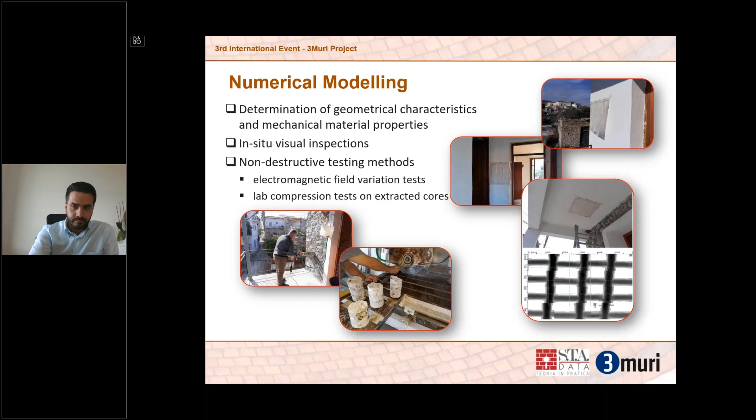Due to the flexible floor diaphragm present in the stone masonry structure, we could identify single wall modes and in-plane floor distortion. Same thing also in the Y building direction.

We perform a pushover analysis in the original building configuration. We adopted the uniform and modal load pattern, controlling the average displacement of the second floor of the flexible floor of the stone masonry building.

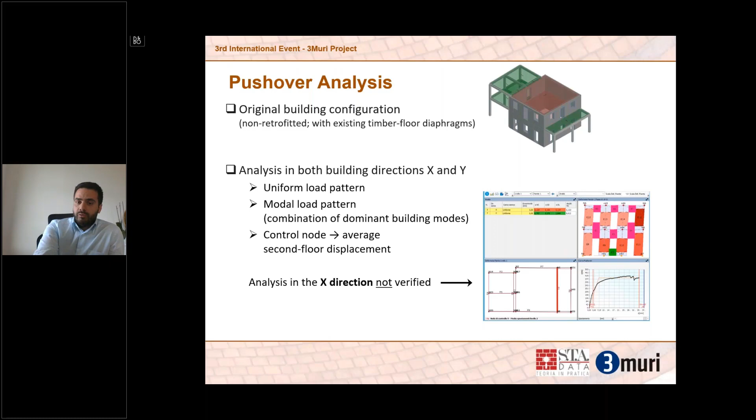As you see, the analysis was not verified in the X direction. That was presumably because the flexible floor diaphragm didn't transfer sufficient gravity loads to the walls, and didn't provide sufficient coupling between orthogonal walls. The building appears quite weaker in the X direction, which is along the balcony, the span direction of the floor, due simply to the fact that there are no gravity loads resulting from the floors.

Based on this evidence, the first thing we proposed was the stiffening of the floor diaphragms and the addition of extra weight through the addition of RC topping.

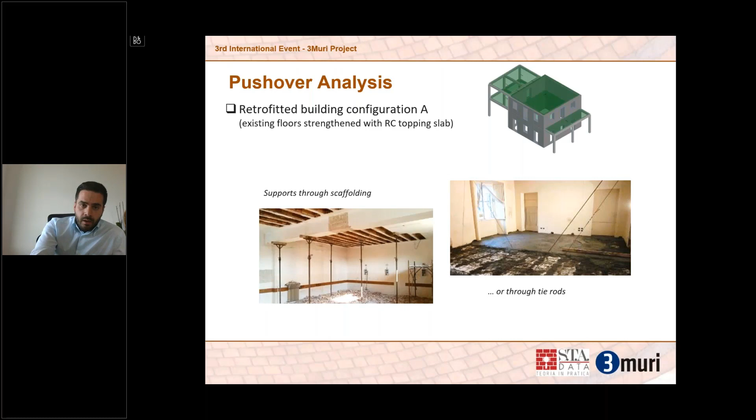We proposed also different ways our client could move into applying this retrofit solution. The first step would be the strengthening of the perimeter of the new floor diaphragm through a reinforced ring beam that also reinforces the connection of the diaphragm with the perimeter stone masonry walls.

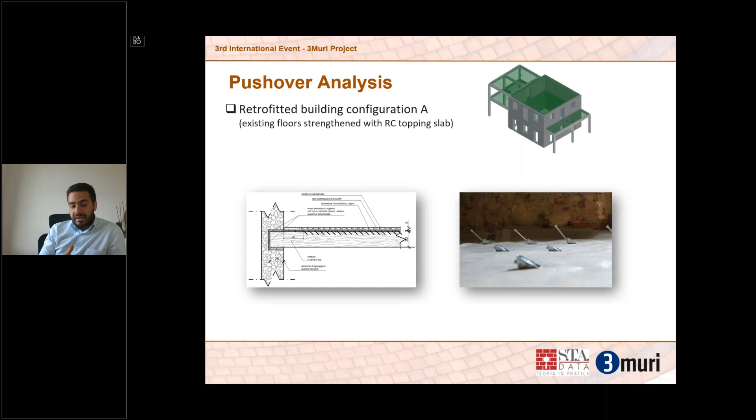We assumed a 15 centimeter thick reinforced concrete topping. We also provided detailed drawings on the application steps the client should follow, and how with small details like this, he could assure a good coupling between the old timber seating and the new reinforced concrete slab.

We performed pushover analysis on the retrofitted building to see that the response was significantly improved. In particular, after stiffening the floor diaphragm, we do not have local modes anymore. The building exhibits a box type response where parallel walls move together.

Here you can see the improvement of our strengthening proposal on the lateral load capacity and displacement capacity of the structure. And now the structure was verified.

We went one step further to examine what would be the extra benefit of applying textile reinforced mortar jackets on some or all of the stone masonry walls, to find out that although in some cases that would result in increased lateral load resistance and increased stiffness, for the cost of this retrofit intervention, maybe the benefit wouldn't be that effective.

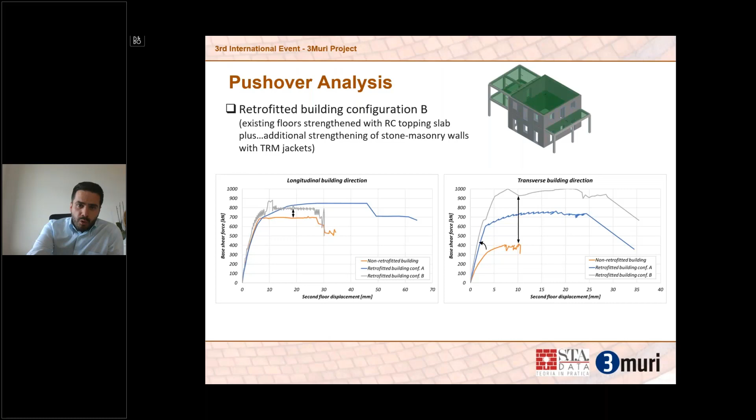So this is my presentation. I would like to thank you for your attention. It was a simple case study showing how, in a very fast way, I built a numerical model of a mixed structure and performed a very fast assessment of the structure before and after strengthening.

Thank you, Stelios. Thank you also for keeping the time not too long. Your presentation, I think, is an excellent conclusion for the webinar today, because you have shown how even in a simple case like this, or relatively simple, we can support the design of retrofit interventions by proper modeling, by proper simulation, and this is very helpful for practitioners and for conceiving suitable retrofit strategies that, in principle, we think are correct and helpful in enhancing the properties of the building. But when you want to quantify, you need tools flexible enough to adapt to the real building constraints and the interaction of different parts, which we know and possibly know better after the intervention.